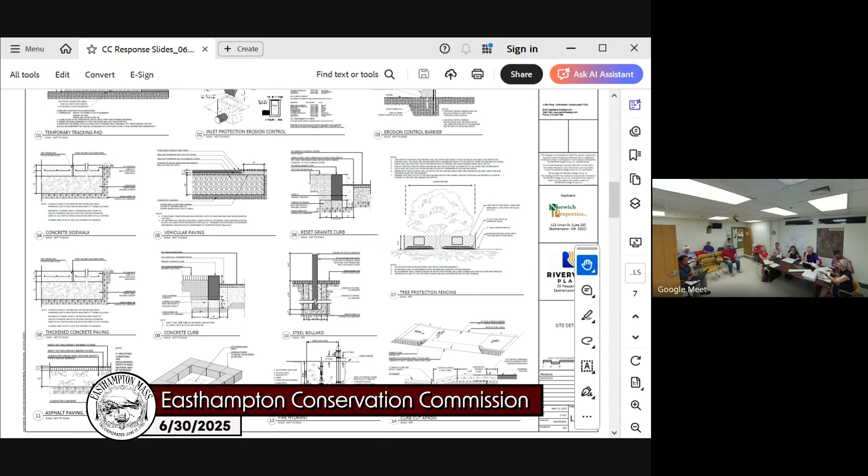We also followed up with that same sheet set. There is also a hard copy of 11 by 17 floating around. That just clarified a few of the erosion control details that were mentioned on the last plan. So inlet protection, sort of standard silt sack. We did include some additional protection around those existing catch basins in the way of a staked hay bale barrier. So those two elements, insofar as the existing drainage system would remain in place.

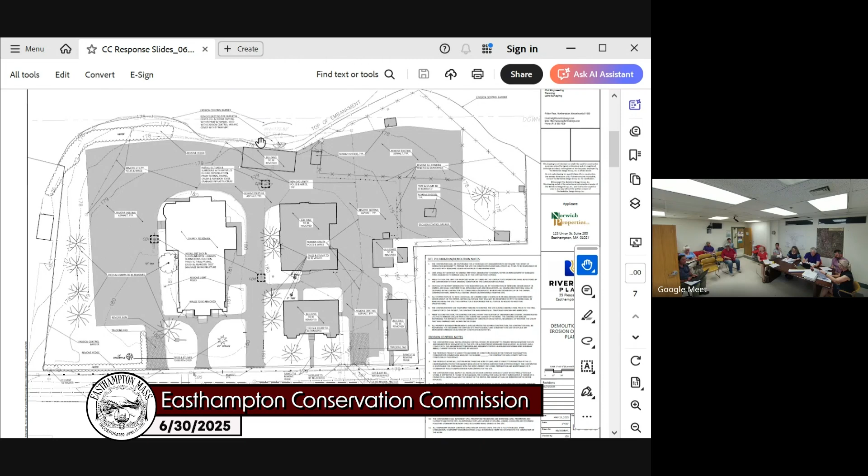We are also showing a little bit of erosion control down slope of the pipe outlet. The reality is, as soon as we start construction and a lot of this asphalt gets removed, we're going to cut down on the amount of water that comes out of that outlet regardless. But either way, we're showing protection for both locations.

And then details, following up with the phasing plan. What this attempts to do is start with phase 1, outlined in blue. In that phase limit, you can see the extent of the existing pavement with the solid hatch, then overlaid with the proposed. The proposal will be to saw cut that edge of existing asphalt so these units could be constructed. The erosion control and existing catch basin, in this location and this location, would remain in place, just as we discussed earlier.

And then this phase would get built out. They would renovate the church as part of phase 2, which is in this purple area. That's a very limited site work phase, mostly just the church renovation.

Phase 3 is this front piece, which has got these two rows of buildings. Again, this drive lane would remain largely in place. We're carving out just enough to be able to construct those units, but access would be via that existing driveway and whatever asphalt exists on the eastern part of the property. And then this would get saw cut, this would get removed, these would get built. Similar to phase 2, this is mostly either lawn or covered with other material, and paved access would remain.

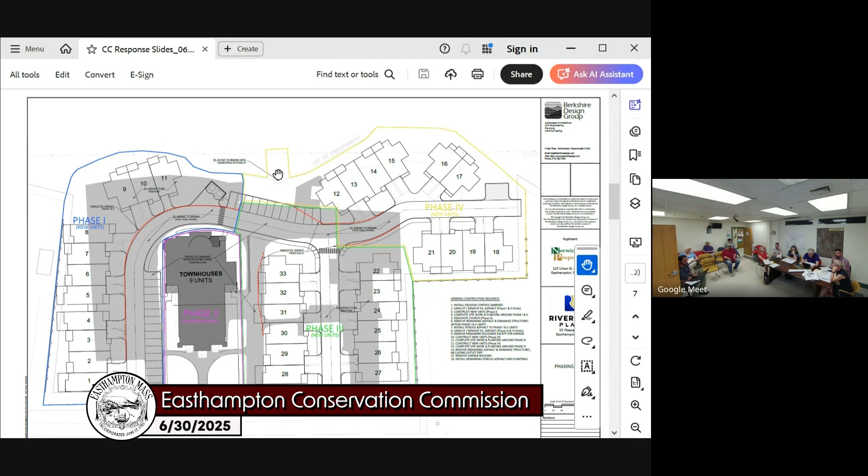It's simple, but the multiple phases make it a little harder to explain. Essentially, that porous asphalt would be the last site piece to go in, as well as the demolition of the existing stormwater system, so all that renovation and restoration for that pipe outlet would occur during that last phase.

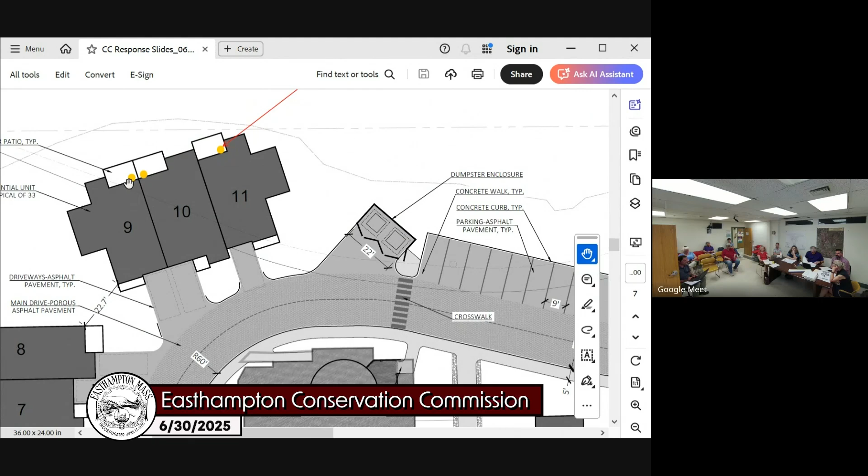So that was the phasing and construction information. Lighting information - what we did is try to highlight on this plan those lights that face north for the resource areas. There's essentially one sconce at each entry to the back. There's 3 units here, so there would be 3 in that location, and there's 4 units here, so there's 4 in that location.

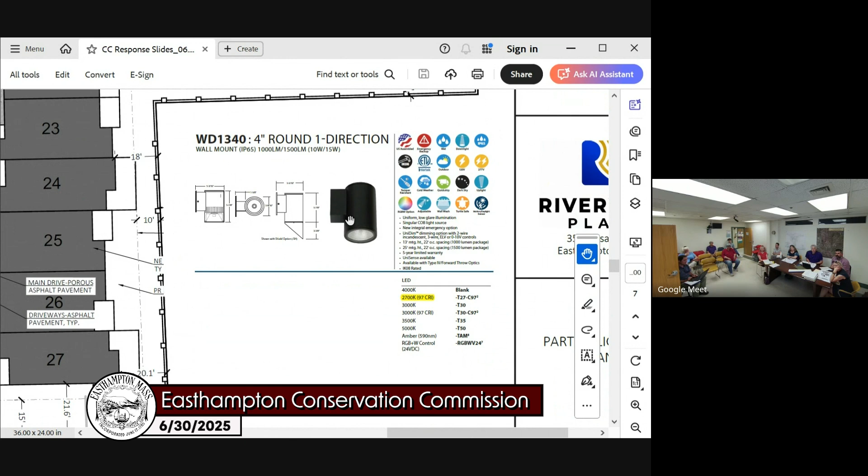The fixture we were able to find - it's funny with these residential fixtures, it was hard to find ones that had all the specifications needed to demonstrate compliance. So there were a couple that seemed appropriate, at least for this architecture. This is a very simple, round cylinder can fixture, but it's dark sky compliant. It's got bug ratings, it's at 2700 Kelvin, which is a much warmer temperature. Again, these are just small downlit wall sconces at the back of those units I just spoke about.

So that was clarification on the lighting.

Wanted to provide some - I'll speak to this later with mitigation and restoration numbers - but as ongoing discussions with the planning board and concerns about access down the slope, and I think you may have mentioned it, one thought was rather than propose a fence or something like that, why don't we just plant a hedgerow of native vegetation there to act as a barrier for people.

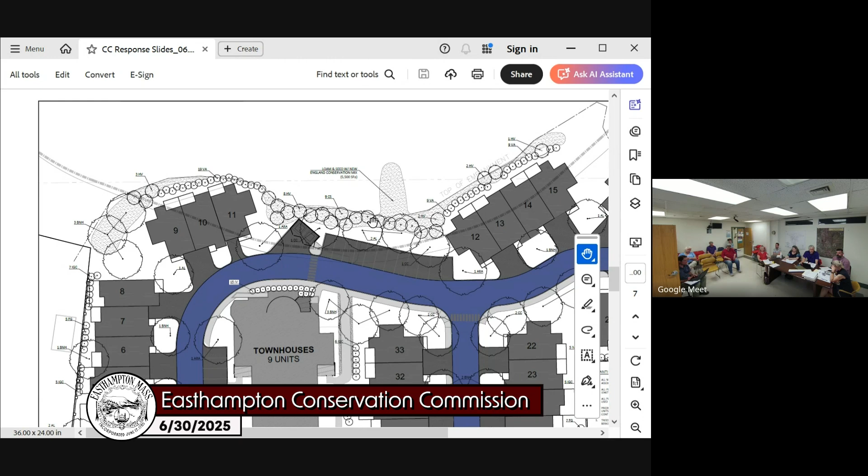It would both provide additional stabilization and provide a visual barrier. That augmented with some native conservation mix, similarly along the top of that bank and in areas that aren't directly related to or adjacent to the rear of these units, would all be this conservation mix, as well as down in that ravine where the stormwater outlet is.

So that has all been - there's witch hazel, cranberry bush viburnum, and what's the other one - there may be red twig dogwood in places. Really the goal was to try to find some low to medium height stuff with a fairly fibrous root system to help stabilize the bank, offering a more intense root mat than some other options. So that was the reason for selecting those.

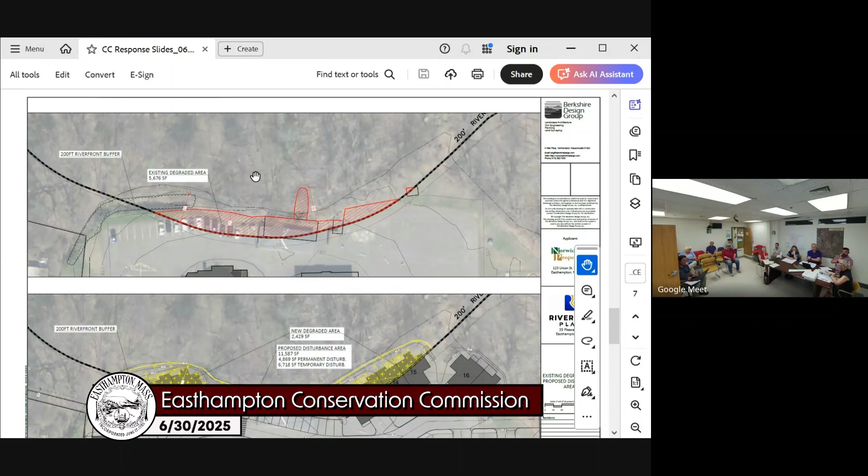Then there was a request to identify some of the existing and proposed disturbance areas, their distances, and some of those square footages. So in this top figure, what you see in red is, certainly along the top here, existing degraded building and/or asphalt up to this fence line, which runs along with this line here.

This area has obviously been degraded and continues to erode. It was a little bit arbitrary where that oval was, but I felt it was fairly conservative - this distance is probably only 20 feet from that outlet, 25 feet, maybe 30 feet. So yeah, just trying to think of what would qualify as a degraded area associated with that outlet.

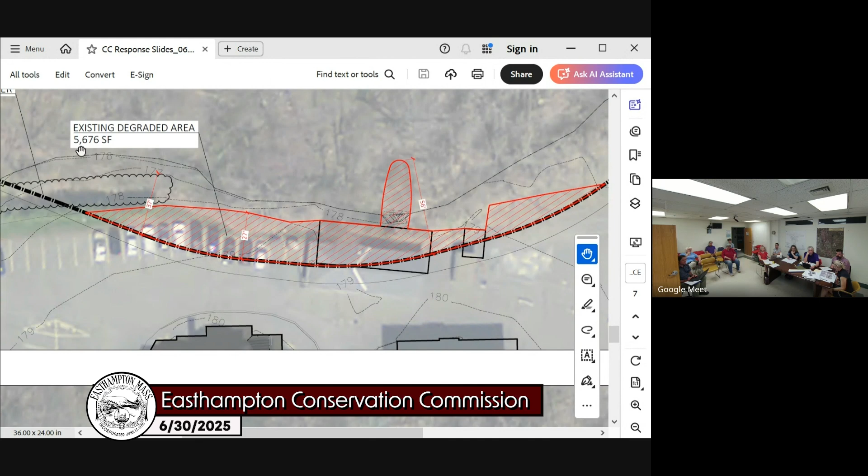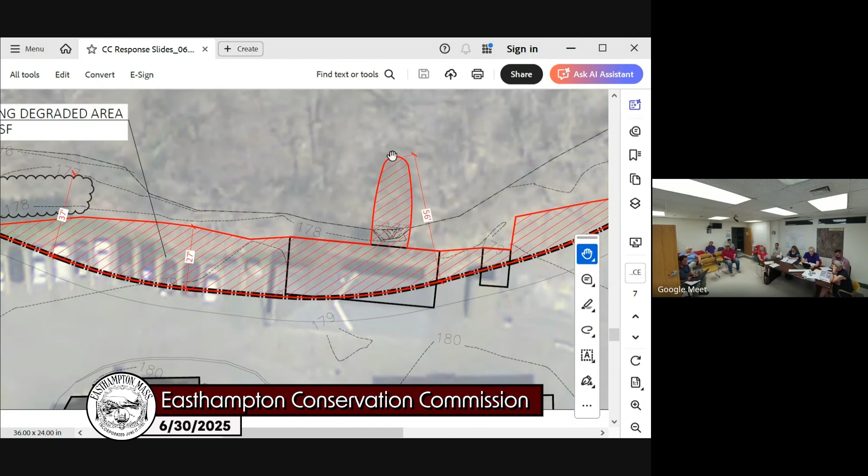So what you see here is a little over 5,500 square feet, 5,676 square feet. The distances: to the back of that hedgerow that exists is 37 feet, the furthest distance to the paved area or building is 27 feet, and to that same point in the eroded gully is just north of 50 feet. That end point is a bit arbitrary, but it's a fairly conservative estimate. There's also a little portion of a shed that sits in there.

With respect to the proposed work, what you see outlined in the overall yellow is overall disturbance. Some of that is temporary, some permanent. What you see in the larger crosshatch is areas that are permanently degraded, or the solid hatch are permanently degraded. The larger crosshatch is what is temporary, that will be restored with vegetative cover.

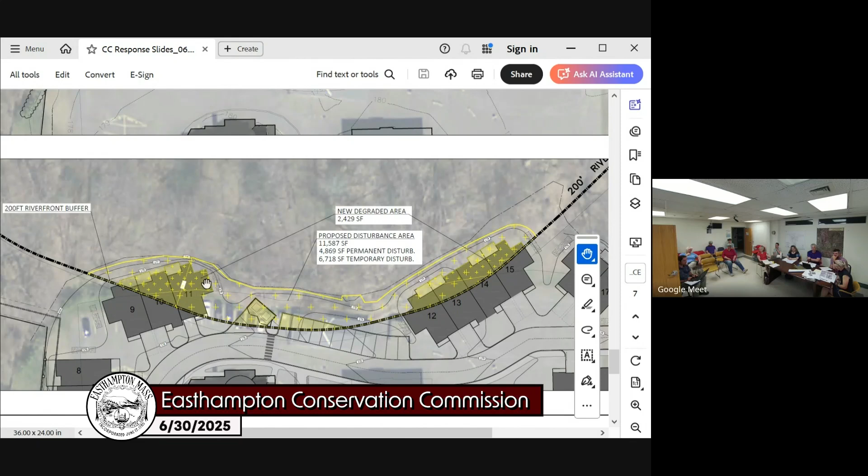What's in the double scale, half scale crosshatch - this area here and this area here - is area that is currently undegraded and is proposed to be degraded. So it's just these two areas, which is about 2,500 square feet. There's 11,500 square feet of overall disturbance.

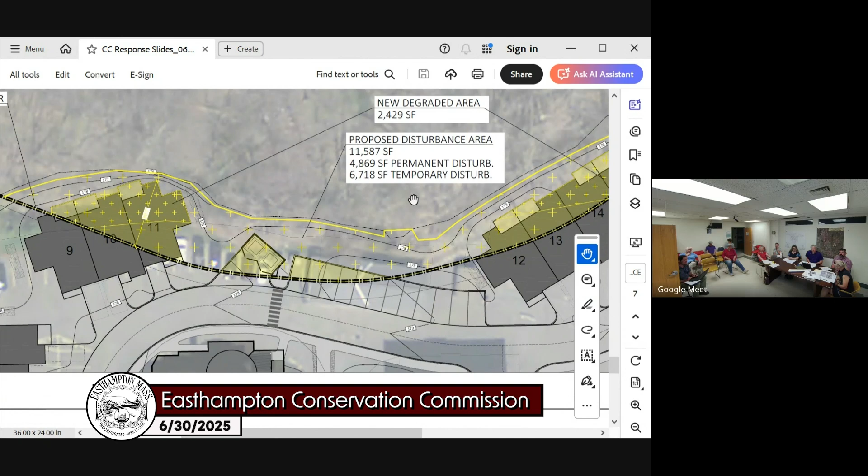There's 4,800 square feet of permanent disturbance - that's any paved areas or building areas - compared to the 5,676 square feet existing. Then there's 6,700 square feet that are just grading and will be restored as part of a mitigation plan.

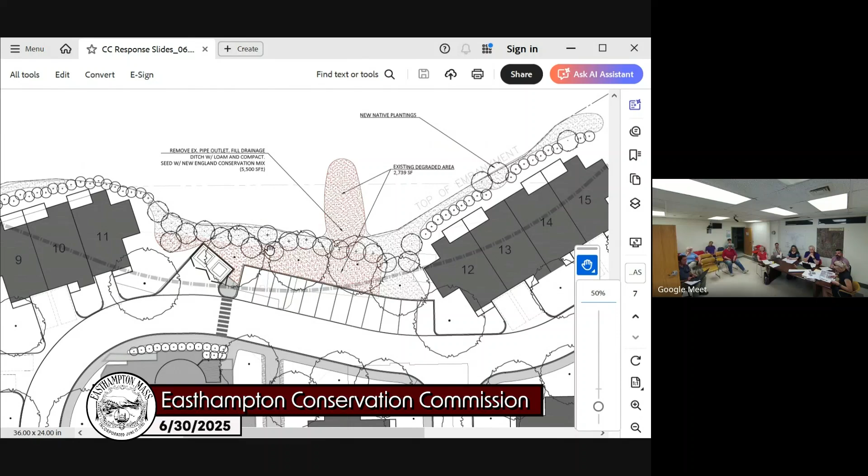So that mitigation plan - what I'm highlighting is areas with this red hatch that are currently degraded and are being restored. So those are restoration areas. This is about 2,700 square feet, which is the existing degraded area. Then the remaining planting along that hedgerow, as I talked about, and that conservation area amounts to an additional...

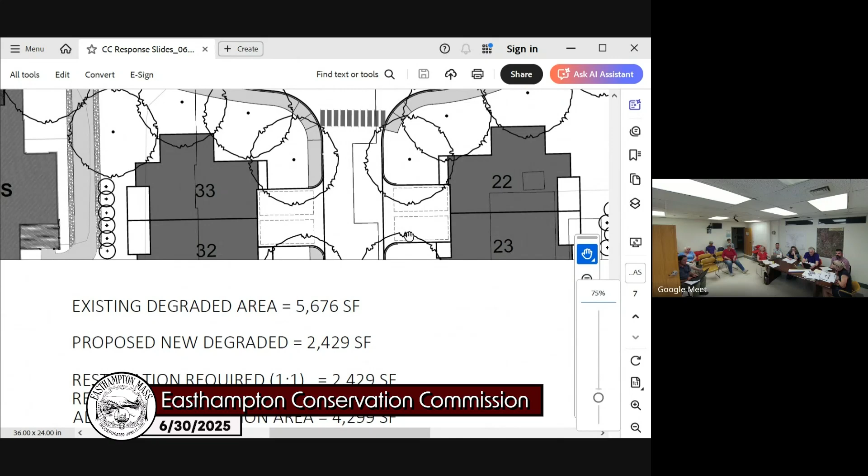Additional 4,300 square feet.

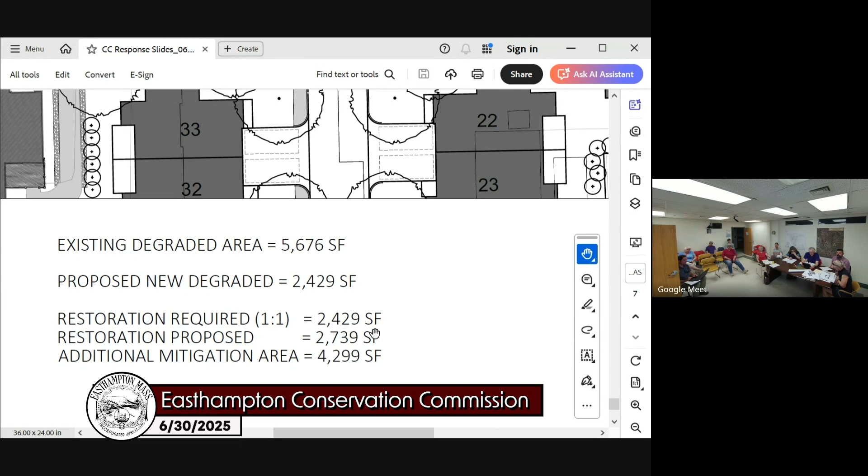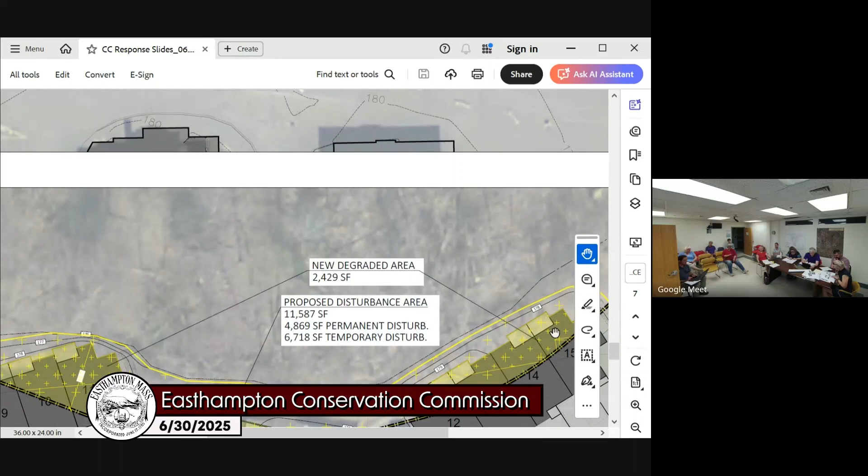At least the areas that currently don't conform to the requirements - understanding that expansion of areas shown in this figure, these half scale crosshatches - those are areas that are currently not degraded and will be degraded. So those don't conform to the requirements. The mitigation or restoration required is matching that square footage.

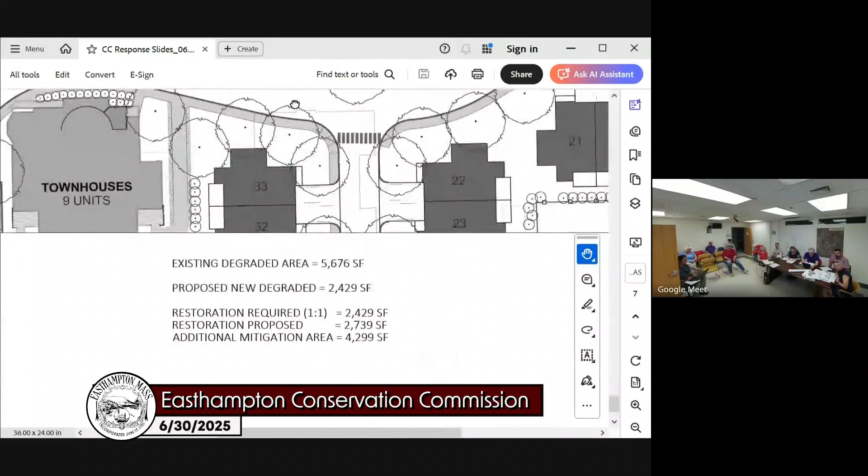We're proposing 2,700 square feet in these red areas for restoration, and then there's an additional roughly 4,300 square feet of mitigation that we're providing across the top of that bank in the form of conservation seed cover or native shrubs.

I think that was it in terms of the updates that were requested or additional information requested.

They pointed out there's some comments that came from the DPW today with regard to the asphalt, but we're continuing to have that discussion. We'd like to get a resolution at some point because the planning board is waiting for the conservation commission, and it's one of these chicken and egg things. If there's a way to get through some of these with conditions, we can defer it to the planning board's decisions for whatever falls within their jurisdiction. We're certainly open to that, but happy to answer any other questions or comments.

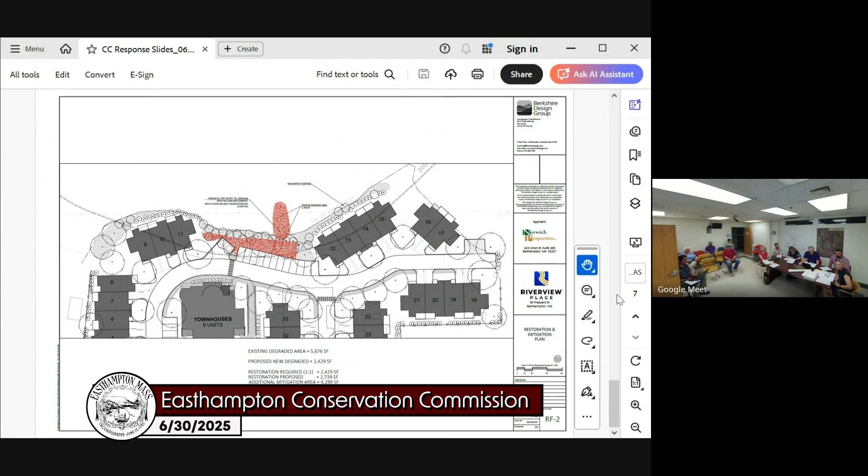So I have a couple more additional pieces of information to share, and a long public comment. I have some more information around the lighting plan, some more information around porous asphalt, the city engineer's comments, and then this public comment. Commissioner Russo, do you have a preference for the order we take these in?

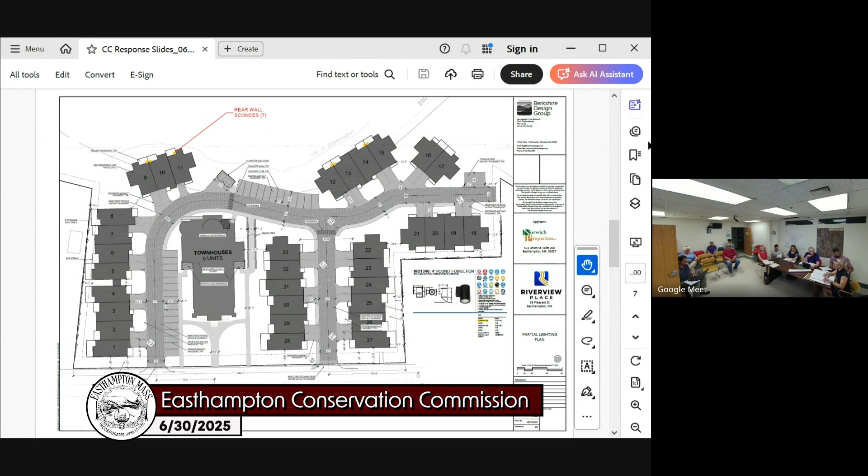Okay, I'm going to project the public comment first. We'll start there, the written public comment, if the commission's comfortable. It's kind of a long one, and it's around the chimney swifts that live in the chimney of the church. It was already addressed at planning board, but it was also addressed initially to the commission as well.

So can we read it if it's this size? I misunderstood - your question was, can you make it a little bigger? Yeah, I didn't wear my glasses. Yeah, that's that.

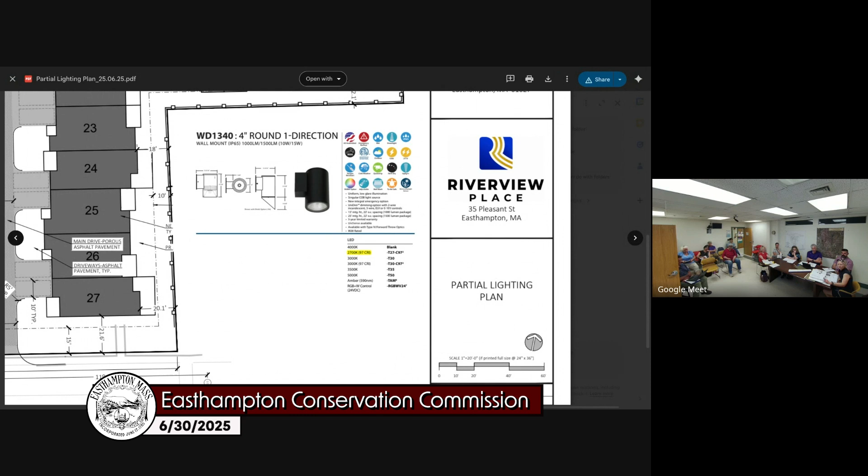Okay, so that was the lighting piece of it. The next piece I have - why don't we take a look at the city engineer's comments next, from Diane Reesing-Smith, which I just received this afternoon, so no one has really had time to review them yet. But we'll just take a look, with the knowledge that we'll have responses to them down the line.

Jeff, what is this project actually called? I've seen three different names in three different places. Riverview. Here it says Riverview, somewhere else Place, there was a third one. Yeah, Riverview Place should be the name - that's what we're really calling it. Yeah.

Riverview Place, okay. I'm going to read aloud her takeaways - her comments are in paper form in the file as well. Conservation Commission and whom this may concern: I've reviewed the stormwater permit submitted for the proposed Riverview Place project at 35 Pleasant Street in Easthampton. The permit has been reviewed for compliance with Mass DEP stormwater standards and the City of Easthampton stormwater ordinance. The following memo outlines my comments on the permit application. Here are a few takeaways from my review.

A portion of the northeastern porous pavement may not meet the 3-foot separation requirement between the infiltration structure and estimated high groundwater. A number of the infiltration trenches do not meet the 3-foot separation between the infiltration structure and the estimated high groundwater. The trenches are deeper than the porous pavement and thus require groundwater to be deeper. The stormwater for the entire site is proposed to be managed through infiltration trenches for the roof drains, porous pavement, and general lawn and planting area, and overland sheet flow. This relies on infiltration to work as designed and good management of the system over time.

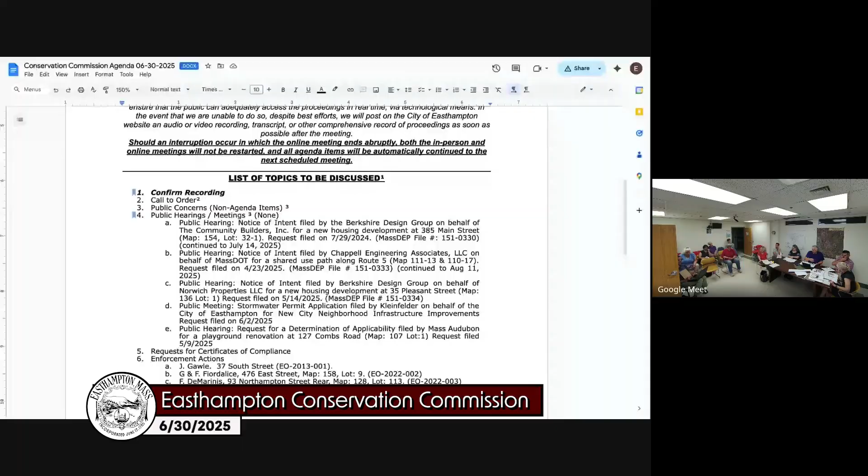And that would remain there until such time that the building and the garage all come out. Would it be better to get the garage out of the way just in phase one, and just leave the pad there, but get the garage out of the way so you have access to the gully?

Just for potential repairs, just to keep an eye on things? Yeah, I hadn't really thought about that. It's kind of buried back there a little bit, it's hard to get to. No, I can certainly talk to the owners about it. I don't see a reason why not, it doesn't really have much value, so.

Jeff, do you have an overall timeline for phase 1 through phase 4? Is this like one phase every 3 years, or are all the phases continuous? I think it's gonna be dependent on sales, the market, the absorption rate through that construction.

I think they're gonna do phase 1. They'd like to break ground in phase 1 as soon as they can, I know he's chomping at the bit. Then during that time they'd finish up all the construction details for the church renovation, and have a better sense of how sales are going and what the market looks like. If they can roll right into phase 2, I know they would do that, because it's far better for them to keep moving rather than pull off the site and come back.

So I think if they can roll right through, they will do that. I think phase 1 and 2 would immediately happen, and then there may be a breathing period just to see what happens. So given those unknowns, I think we need to dial this phasing plan in more tightly, to know that for whatever gets constructed, we're going to have a functioning, compliant stormwater system that meets what we're approving - not the leftover one.

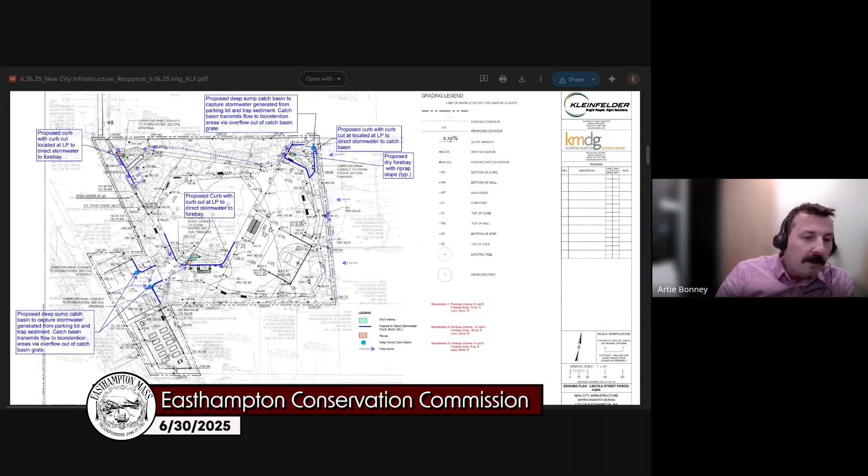And then what we used was a series of curbs. So maybe, Ava, we could zoom into the center bioretention area right there. Yeah, please. So the blue lines that you're seeing will be a curb or a berm of some sort, something to direct stormwater flow coming off of the cement concrete surfaces and the hardscape surfaces, and directing that flow to the forebay area. And so the forebay area is in green, and there'll be a riprap going down the 3-to-1 slope to slow down the movement of the stormwater as it's channelized.

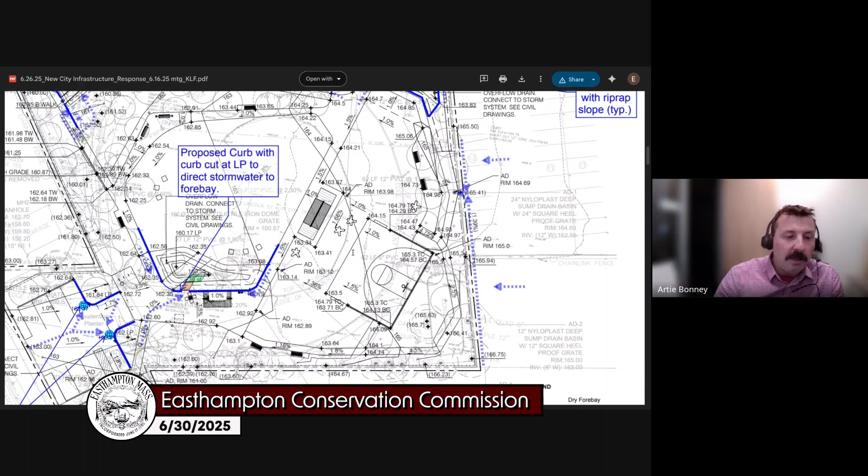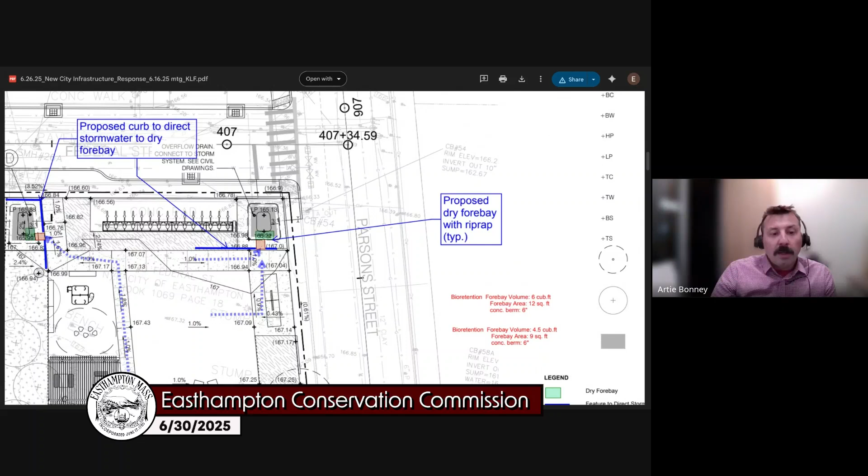So that's really the design intent behind this plan. And then we did a similar approach at the Parsons Street Park. Ava, maybe we can just go to the Parsons Street Park and zoom in on one of those so we can take a look and show how we're implementing that curb area, implementing curbs to direct flow into the forebay. And the forebays have been sized to capture the water quality volume.

Awesome, Arthur, I'm going to pause there if there are questions from the commission. I think it would be helpful to go through each question and response and move through sequentially so that we have a full discussion on each of these questions and responses. Yeah, that makes sense.

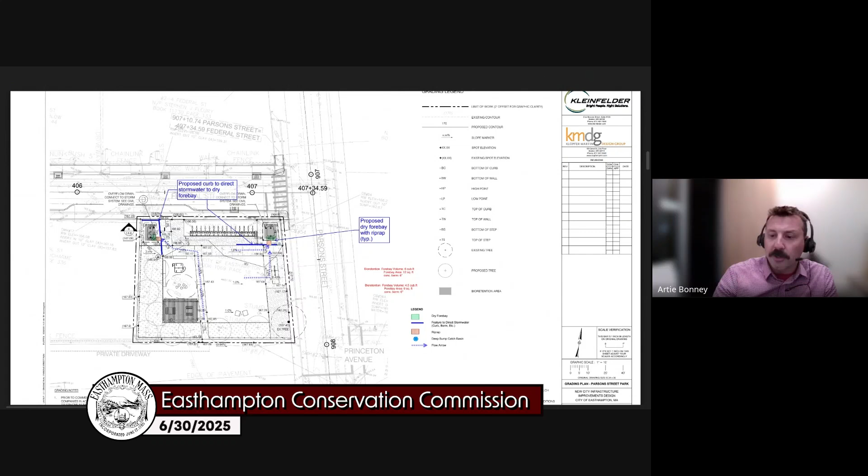No specific questions. Anyone else from the commission have any questions? No. Okay, anyone from the public have any questions on this? Great.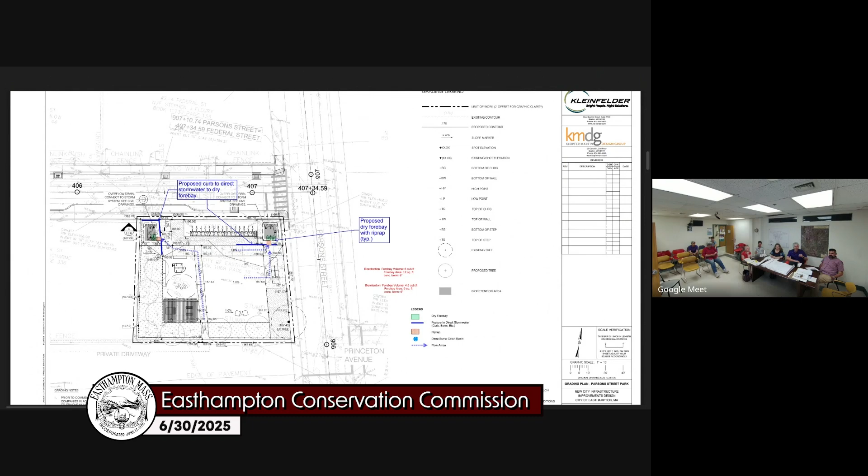We appreciate this opportunity to share this with you. So question 2 is about the operations and maintenance plan. What the commission indicated to us is that the operations and maintenance plan we provided as part of our stormwater management application was not signed, and it also did not specify the signatories for the plan. We've had discussions with the city and internally. Johanna, would you be able to share what the city's response is to this, please?

DPW responded that the maintenance would fall within practices they already do, so they could handle it. Parks would be assisting with the maintenance of the rain gardens located in the parks, so both of them will be signatories on the O&M plan. Great, awesome, all right.

Question 3: how many trees are removed for the project? That's a great question. I'm going to direct this to Kaki Martin from Klopfer Martin Design Group, who's our landscape architect for the project.

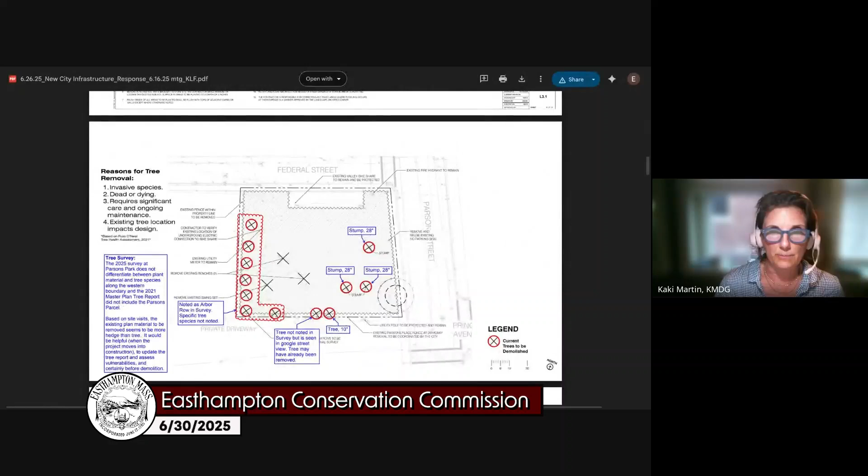Thanks, Artie. Hi everyone. I'm realizing we provided additional graphics about that, which I think you've received, and I'm just realizing somehow we maybe didn't tally it, but in Parsons it's 12. We have the tally in text. Okay, Lincoln Park trees - oh yeah, we did have it, it's just sort of not in the graphics. Okay, there it is in the summary.

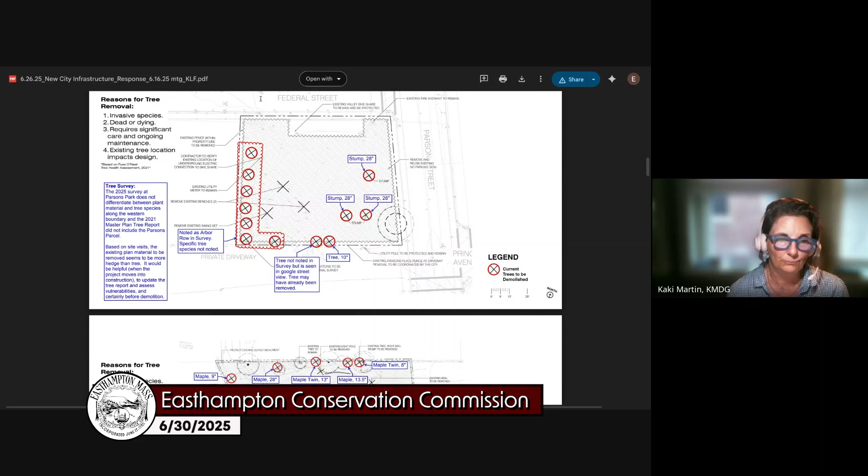There was the report that was part of the master plan from 2021 that assessed the health of a certain quantity of trees. The survey work done in 2025 is very current and captured considerably more trees. The survey is obviously the underlayment of our work, and that is what we are using, but for the trees that match up with the master plan tree report, we are using that information for that assessment. Some trees also need to come out because of grading and all the work happening for the parks themselves. Parsons also has sort of an arborvitae hedge for the most part - that's the highest quantity there. But they're coming out for a variety of reasons: they're invasive, not in good health, or their location is impacted by the design.

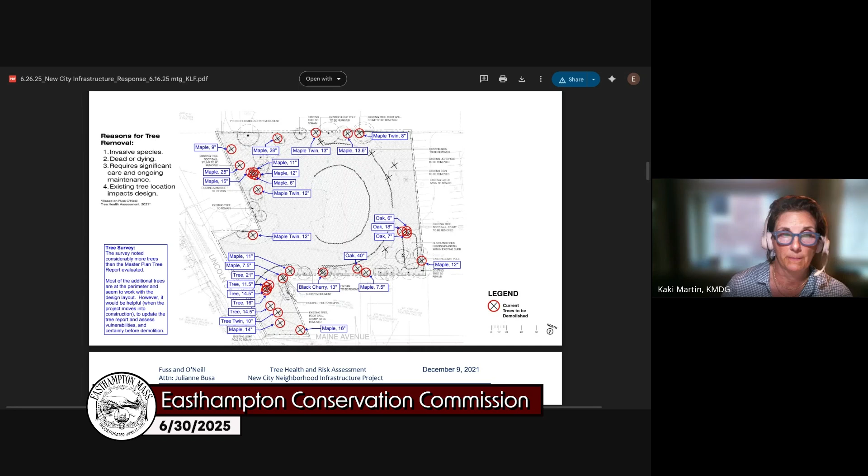Should the commission take a moment to talk about other elements of the planting plan while we're on this, or would we like to do that at the end? Questions on this one? Oh, you've got a list. Do we want to go for that first or let her continue? I think that's the answer to this particular question. I don't have more to add - the summary shows graphically in red which trees are slated to be removed. I think the next questions get at stormwater, so why don't we stick to plantings for now, if that works.

I think Commissioner August reviewed the planting plan. I also took an opportunity to review the planting plan - do you want to go ahead with your comments first? Sure. Do you want me to start with how I wrote the email about demolition and site plan prep for Lincoln, or go right into the plant schedule? Why don't we go into the plant schedule. Does that sound good? Okay.

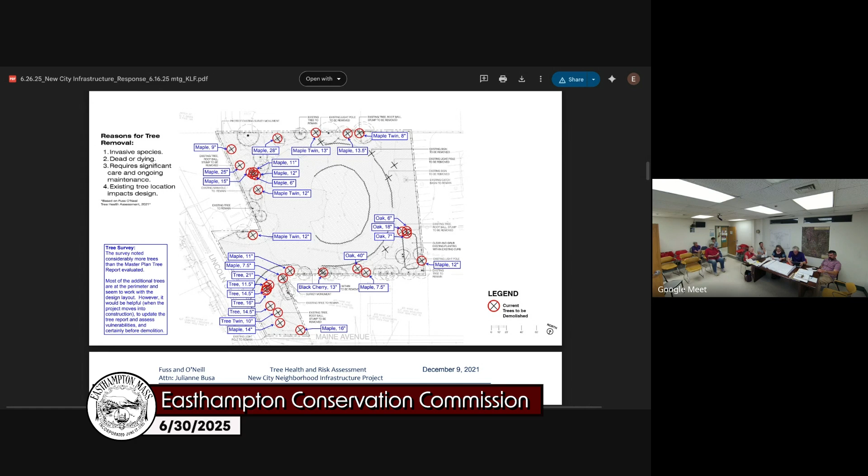On the plant schedule, we like to have native plants and trees whenever possible. As I went through each one, for your trees you have 2 ginkgo biloba, which are not native to North America. And it did say when I was going through everything that this is toxic to dogs and pets, so because it isn't even native to North America, we would ask that you remove these and select a native species to replace them. Yep, and maybe our responses didn't get through to everybody, but we have provided answers to all of these questions - I don't know, maybe you did receive those?

I don't think I've received those. Okay, sorry, you did not receive the written responses. I had thought because of the timing in which we received those questions that we would be able to talk through them. We do have written responses prepared for this, line by line, pretty much.

Does the commission want to wait until next meeting to discuss the planting plan in further detail, until we have the written responses? If you have other questions, let's just give them all the questions now. Okay, sure, they'll have them all.

My only other comment I'll add, from my own review—Kaki, will you pronounce your first name again? I'm Kaki, sorry. Kaki, awesome, thank you.

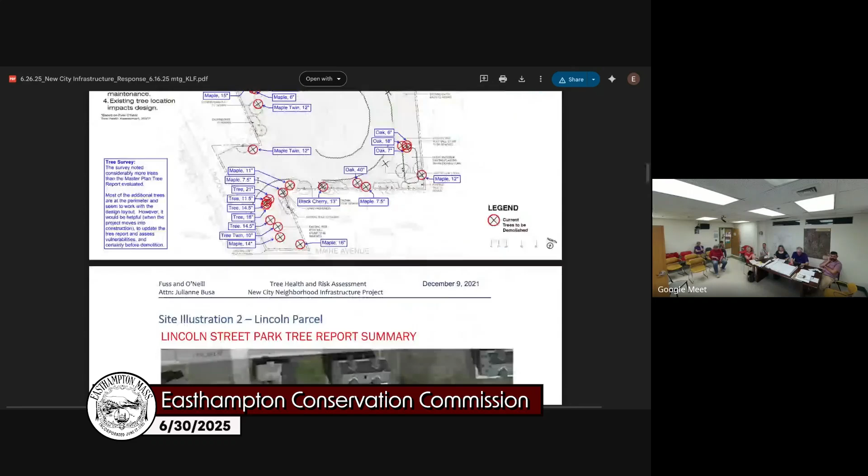Just a few more. I think we are on number 4. Yeah, this is the pre and post runoff volume. Go ahead.

Yeah, I can speak to this one. We were asked by the Conservation Commission to indicate what the total runoff volume was for each of the design year storms. And so that's what this table indicates - the entire volume that would occur in the simulation of each of these storms, in acre feet.

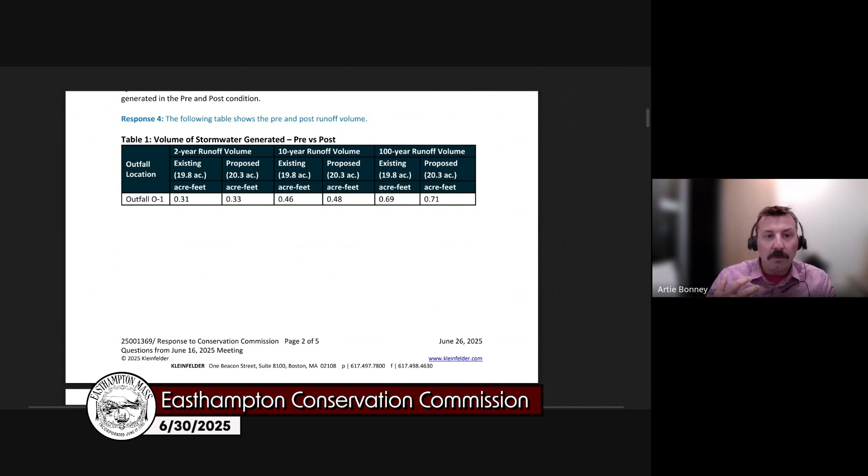What's not surprising, I guess, is that there's a bit of an increase in the proposed over the existing. The reason being, as we indicated last time, the project is taking on additional impervious area and bringing that over to the outfall based on the new design for the roadway. So we're capturing some drainage that's typically going down to Parsons Street in the existing condition, and bringing it to the outfall instead.

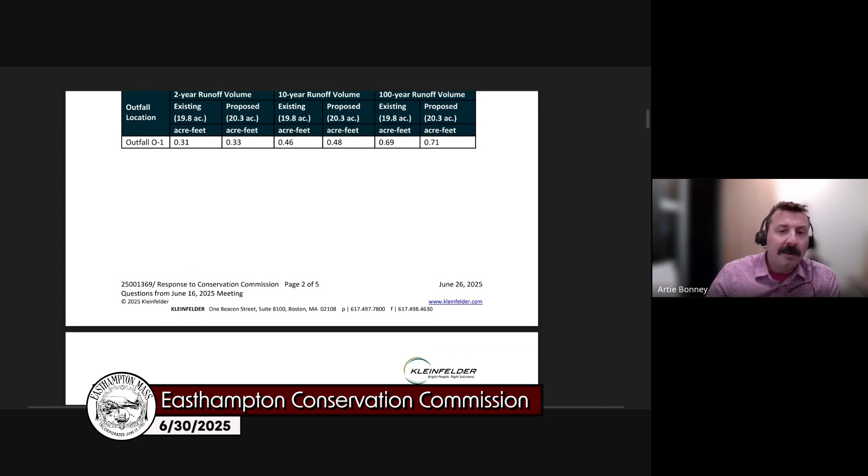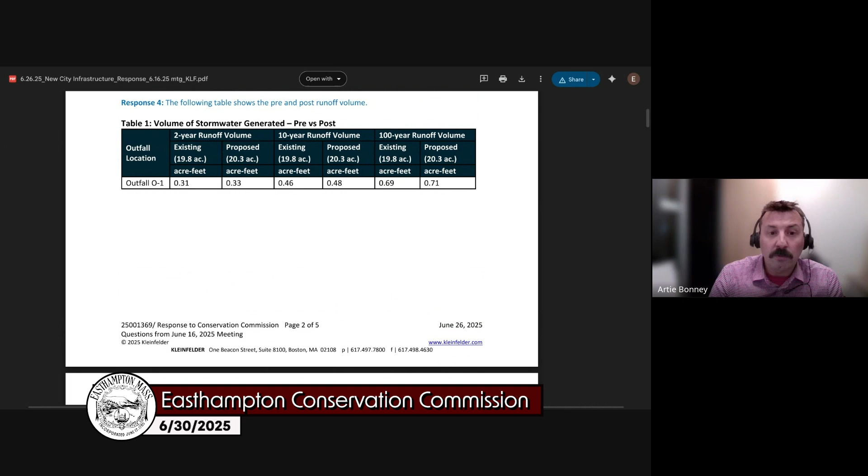And also, the stormwater design for the roadway part of the project - that part is not within the jurisdiction of the stormwater ordinance in the same way. We believe for this criteria we need to demonstrate that we're doing this to the maximum extent practicable, and not reducing the proposed over the existing.

Great, thank you Artie. Any questions on that, Commission? So basically it's not generating new stormwater volume, it's just taking stormwater volume that's going to a different drainage area and kicking it back in this direction because of the drainage changes that are occurring, right? That's right, that's what I'm getting at. Yep, okay, awesome, sounds good.

Okay, question 5, standing groundwater and soils. The commission asked to confirm the drawdown time of each bioretention practice, and here we have a table for that. I'm happy to explain this as well. Basically, what we did was indicate what the groundwater level was observed at the boring closest to the bioretention basin. In most cases, the groundwater was below 10 feet. The borings were conducted at 11 feet.

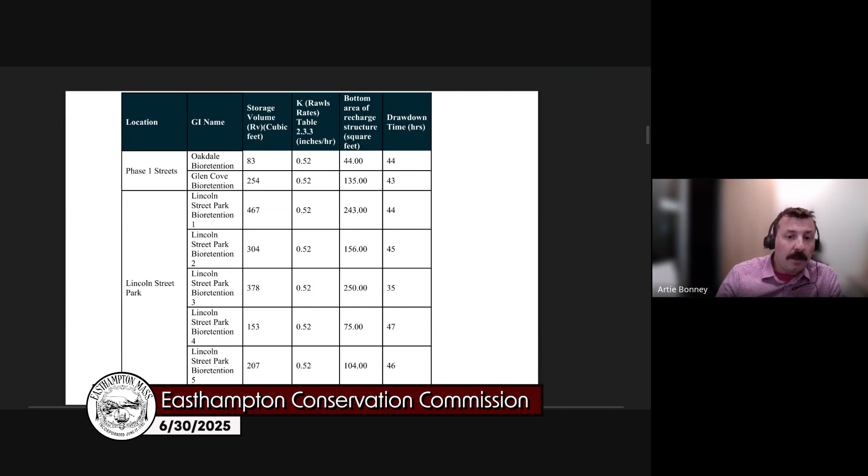We were also asked to calculate the drawdown time. The commission had indicated they do have some instances with bioretention practices where the drawdown time is greater than 72 hours, or they have issues with standing water. This table calculates and indicates that the drawdown time is under the 72-hour requirement.

And that was the final question. Does the commission have any questions about the drawdown time for the bioretention basins? No, good. Anyone else, any questions? So then I think the remaining piece is the plantings - is there any other additional?

Well, I personally think we could be more flexible with the plantings for what this is - a stormwater plan in a park, not wetlands where we're trying to replicate wetland conditions - but I don't want to step on any of my friends. I was just doing my due diligence, going through for us so there's no problems in the future, and we okayed it. My concern was it's a park - there are other animals, dogs, children. So that was just an overarching concern about some of them.

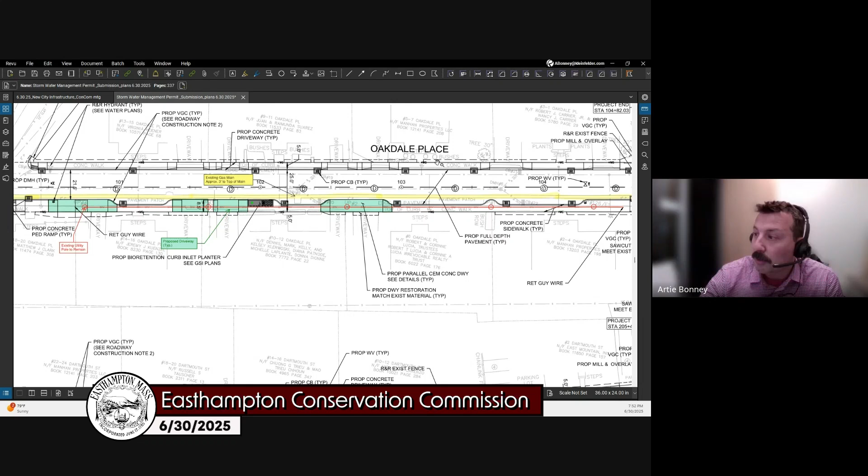What we're looking at right now is Oakdale Place. One key component of this project is that we have to widen the sidewalk to 5 feet minimum to meet ADA and public rights of way guidance, which is federal guidance. On top of that, we have locations with existing utility poles. On the north side of Oakdale Place, where my cursor is, the maximum width of the sidewalk to meet the context we're in, which is residential, is 5 feet.

We're balancing the roadway width to allow cars to park on both sides of the street, maintaining the availability of parking since not all residences have access to off-street parking, and we're also looking to maintain a consistent sidewalk width. So, in conjunction with the city, the sidewalk width on Oakdale Place for the north side is 5 feet, and that's appropriate for the context we're in.

That means to place a tree within a 5-foot sidewalk, we wouldn't have enough space or clearance for a pedestrian to walk around the tree.

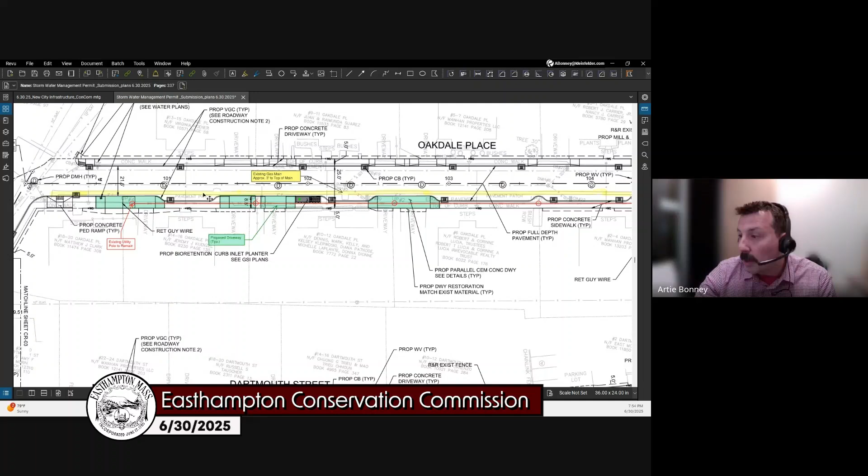When we look at the south side of Oakdale Place, maybe this is an opportunity where that could occur. That's where we're having curb extensions, where the curb comes out into the street a little bit, shown with these two lines indicating the curb edge. But we have utilities as well.

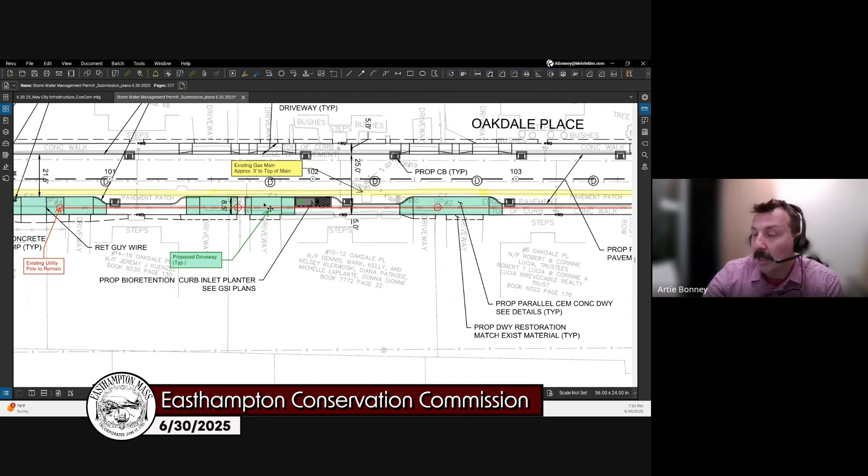We have existing utilities impacting potential planting locations. In yellow, highlighted from our survey, is the location of an existing gas main, a trench where that gas main was installed a few years ago, fairly close to the edge of the curb line. Also impacting us are overhead wires, shown in red, with the utility poles in red circles. So we have some conflicts there.

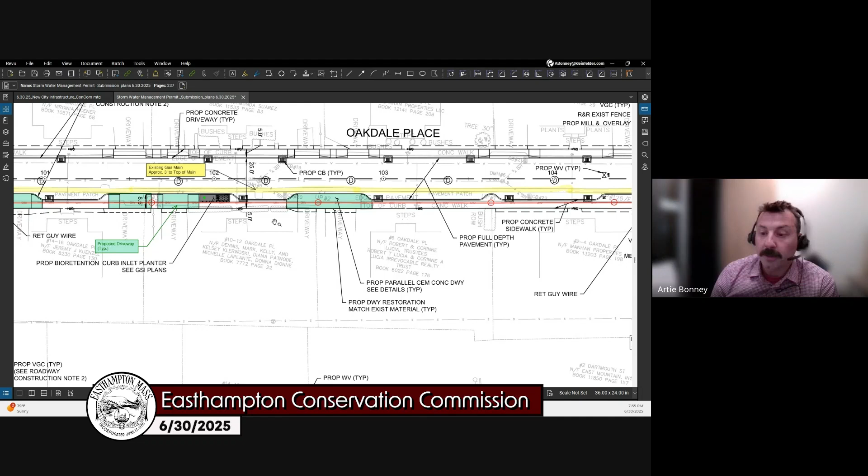Highlighted in green are driveway aprons, areas where vehicles access a driveway. Looking at the available space along this corridor, we don't have space to place trees in this location. We are looking to place additional trees throughout the project, 4 trees at the Parsons Place location, and some additional trees on Exeter and Federal. But unfortunately here, we're not able to place them.

I think it was just that we had heard during the site visit that one of the goals of the project was to create a shaded way for people to walk down to the pond, and here we were on a 100-degree day and there was only one tree on the entire street.

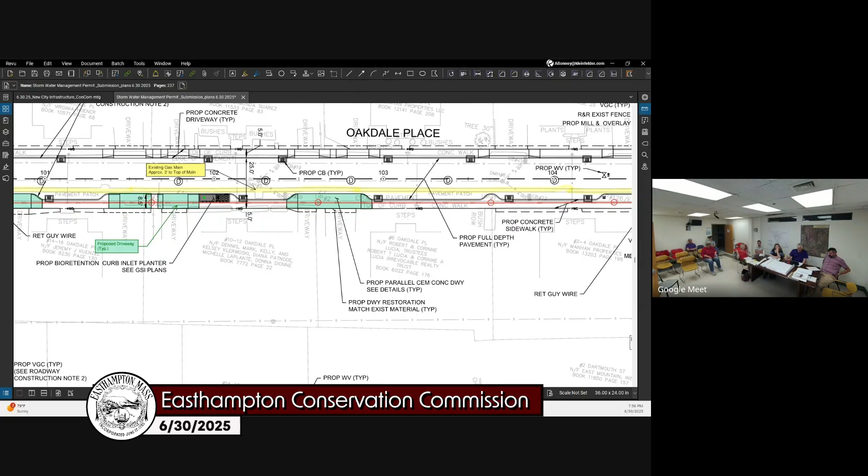Okay, so we didn't know all that, and that's fine. I mean, if you can't, sure, okay. And parking was identified as such a key concern of the community, and it's the widest street, so we were just wondering why no trees here. But that was a very thorough answer, I appreciate that. I hope it wasn't too detailed, but having that site visit on that really warm day, I can see how any bit of shade is good to have.

So, next steps from the commission - where are we at with this? I think we could move ahead.

Well, my only question is, the first thing we talked about was changes to the stormwater design to do pretreatment. Do we have drawings yet for that, or is that done and incorporated? Do you have updated drawings, or should we have a condition about the commission receiving updated drawings? We wanted to have this opportunity to work through with you what the concept would look like, and now that we have approval, we can go forward and make those changes. We don't have the specs for them yet.

Okay, so that would be a pre-construction condition. Can you do that on stormwater? Let's look at 109 - just trying to think of how to make our meetings go faster and get stuff off our agenda. Let me just look.

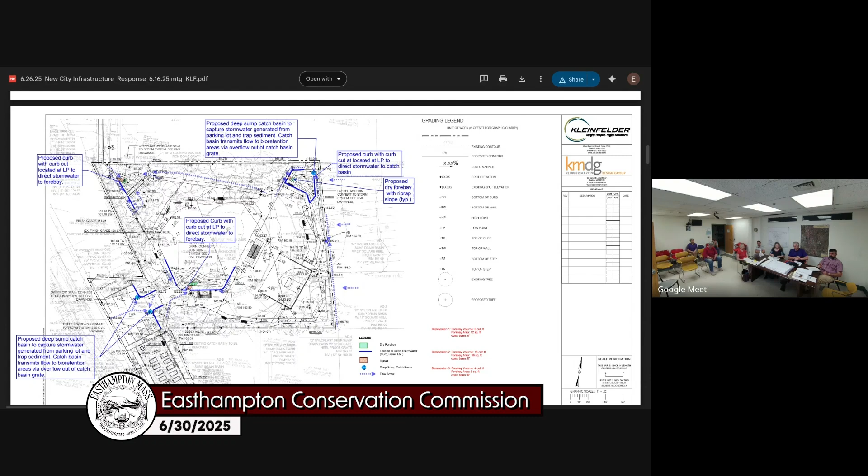I'm not seeing any pre-construction requirements on here. I can just share a previous standalone stormwater permit the commission has issued - this is for 109, our most recent stormwater-only permit for 109 Everett, the cemetery. There's no pre-construction requirement; the monitoring shall just occur.

We could add a pre-construction requirement, or we could wait and plan on closing this next meeting if Kleinfelder can get us those details by then. Let's ask them if that's something that's doable.

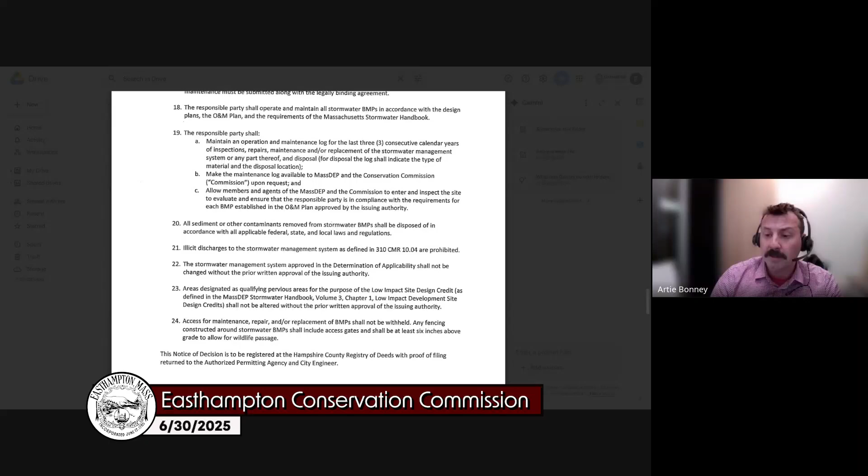Our preference would be to wait for the pre-construction stage. This project isn't going to start - it's waiting for funding for construction, so it's a few years out. We'll advance the design to that level, but we would really prefer if we're able to close this out today so we can continue and finalize our design for the city.

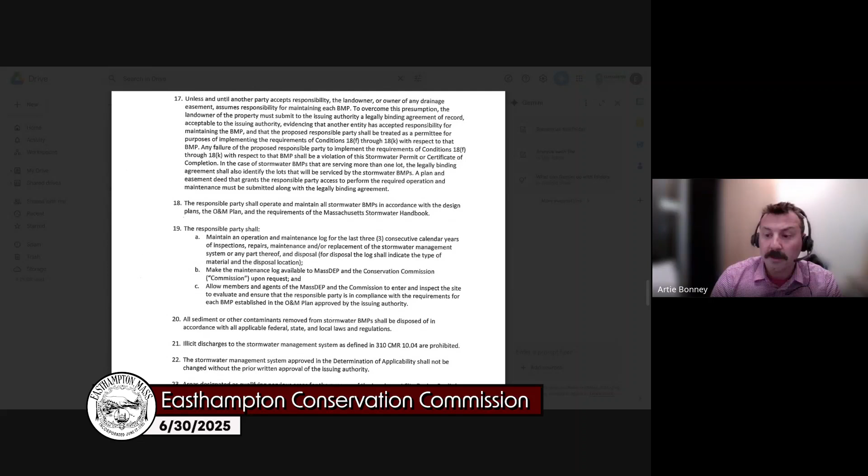I'll add on to that from the planting plan perspective - knowing that we have some time before construction starts, the existing conditions of trees, particularly at Lincoln, could change. We might be tweaking quantities of plant material, especially if a storm comes through and takes out things we thought we were keeping. So we'd feel more comfortable knowing there's a pause here between now and actual construction, where you'd see the most recent, fine-tuned bid planting plan when this project is funded and ready for construction.

I think I can write this with condition 4 here - any change in the plans or deviation in construction from the plan shall require the applicant to file a notice of project change with the Conservation Commission. So if we approve this tonight, you can put that in.

And what would the details give us that we wouldn't get if anything, like if we saw the details now? Well, basically this is saying if you change anything, you need to come before the commission. What I'm saying is once it comes time to go to construction, come to the commission, give us the current drawings, and those should show the information we're looking for - and we can also talk about the planting plan too.

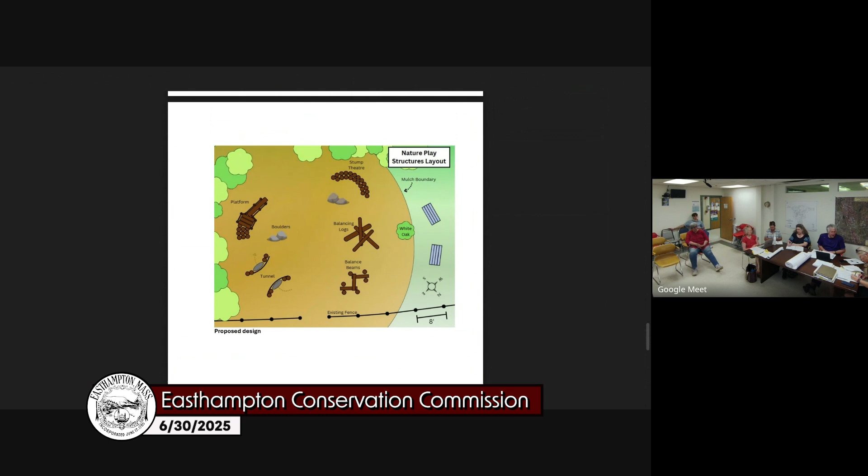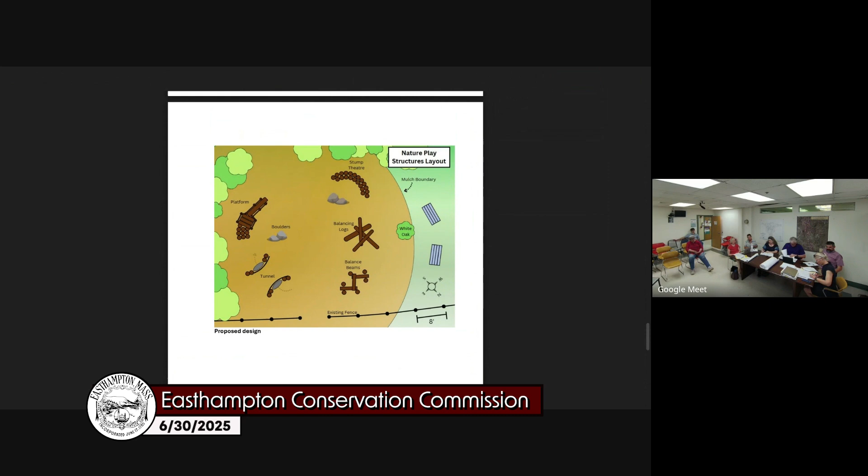Did I hear a second? Second. All those in favor? Motion carries. So 48-hour construction notice, erosion controls as described.

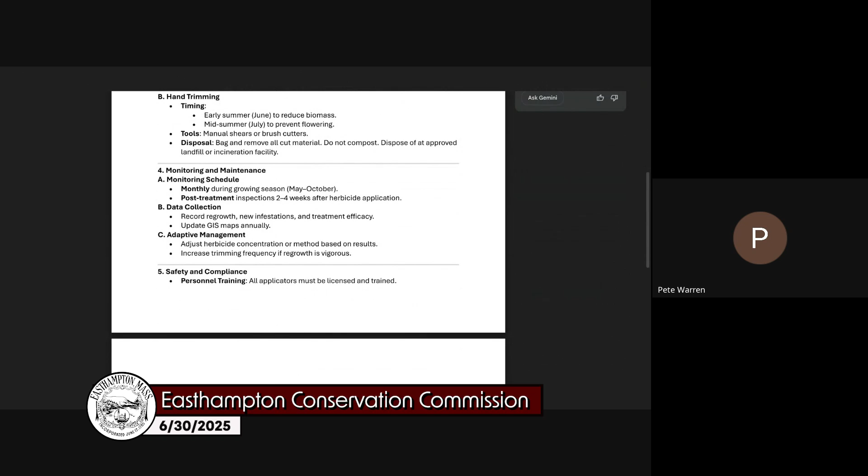So this was their overall plan, and then I requested a specific timeline because my understanding is that the commission was looking for a timeline with checkpoints. So this is the overall plan. It seems in accordance with my understanding of how to handle vast amounts of knotweed, though welcome to the commission's comments. I can give you the quick and dirty gist of the remediation plan for the next 3 years, but this obviously has the specifics, the PPE, and all the treatment sections.

That they'll do, or the types of treatments at each round throughout the year. But the general gist of it is the knotweed remediation and maintenance plan is for 6 treatments per year in 2025, 2026, and 2027, with a reassessment at the end of 2027, working with whichever group is working with the ownership team.

To see if they need another maintenance plan or what have you, they'll reassess that at the end of 2027 and put that forth to you guys. And in this plan we have post-treatment inspections - I guess I would add a quick report after each treatment. Are you requesting that from the ownership team? Yep, if the commission agrees with that. Yeah, I think that's appropriate. As far as I'm concerned, it doesn't need to be anything formal, but even an email report would suffice.

Email assessment - I will submit that to them and let them know they'll need to add that. And I know Rich from years back, I worked with him 15 years ago at another company, so I've known him for quite a while. He's a very sharp guy, kind of the O&M field management director, so he's pretty squared away.